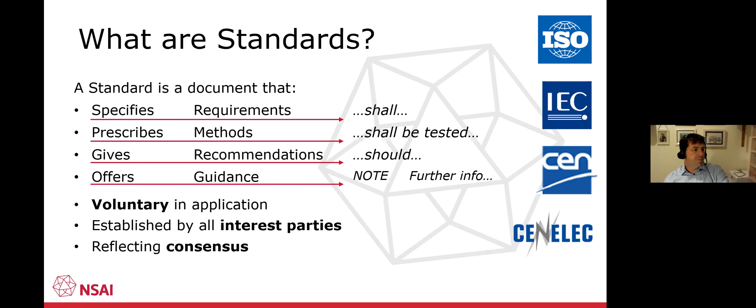Looking briefly at European standards organizations: CENELEC produces all of the European standards for electricity and electrotechnical. CEN produces all of the services and product standards for everything else. And we also have ETSI, who provide the standards for electronic communication.

So if we were to look at a mobile phone, the CENELEC guys would do all of the circuitry standards. The CEN guys would do all of the material standards for the structure of the phone. And the ETSI guys would do all of the standards that make my phone talk to your phone, okay?

That's then based on what we have internationally, where we have the IEC doing the electrical and electrotechnical standards, the ITU providing the communication standards, and then ISO providing all of the other services, management standards, and product standards globally.

We also then have industry standards. An industry standard is a standard that's produced by industry for industry. A few examples: the API standards written by the American Petroleum Institute, used in major parts of the world. However, the API standards have now started to be adopted as ISO standards, and those ISO standards are being used globally. The ASTM standards - as engineers, you'll most likely come across these. They have standards for absolutely everything, especially for materials, and they're quite a fantastic standards organization.

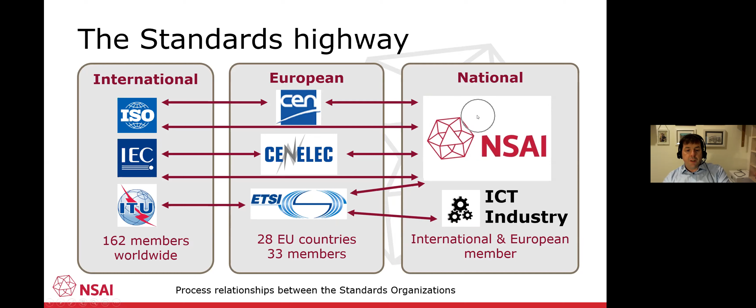So the process for writing a standard is about 3 years, give or take. It starts out with a demand, and a decision is made as to whether or not that work should go ahead. Once the work goes ahead, we spend about 2 years drafting the standard with a group of experts made up of industry, academia, consumers, and regulators. This gives us multi-stakeholder input and ensures that the standard is as balanced and as fair as possible.

When that standard is written, it goes through a consultation process. In ISO, everyone in the world gets a chance to comment on the standard. In Ireland, we publish our standards on a platform called Your Standards, Your Say, so everybody has the opportunity to comment on any draft standards. After the consultation process and the document has been ratified, we publish that document and it is put out there for utilization. And 5 years later, we do a systematic review on it.

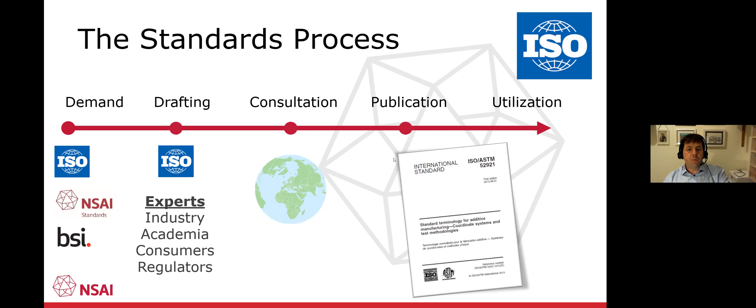Now, looking at the additive manufacturing standards - pretty much for the first time ever, when this new emerging technology came about, and the standards organizations looked at how they were going to standardize it, they decided that they would do one set of additive manufacturing standards. One world, one standard is their motto.

And we have established a partnership. ISO and ASTM have a partnership together whereby they together produce the ISO ASTM standards for additive manufacturing. The Europeans have agreed to adopt all of those standards as they are published.

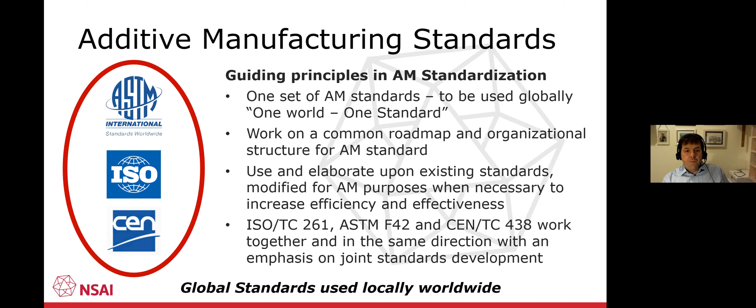These standards are developed in the ISO Technical Committee 261, Additive Manufacturing, with the Secretariat held by Germany. There are 25 participating countries, meaning experts writing these standards come from those countries. There's also a number of observing countries that don't participate.

To date, they have published 19 standards and have approximately 37 standards under development. They're split into working groups: one in terminology, two in methods, process and materials, three in test methods, four in data and design. Those were the four originals. In the last few years they've set up new working groups looking at environmental, health and safety aspects.

They also have a joint working group on aerospace, where the Technical Committee on Aerospace and the Technical Committee on Additive Manufacturing work together to produce additive manufacturing specific standards for aerospace. Similarly, the Plastics Technical Committee and the Additive Manufacturing Committee have joined to produce those standards.

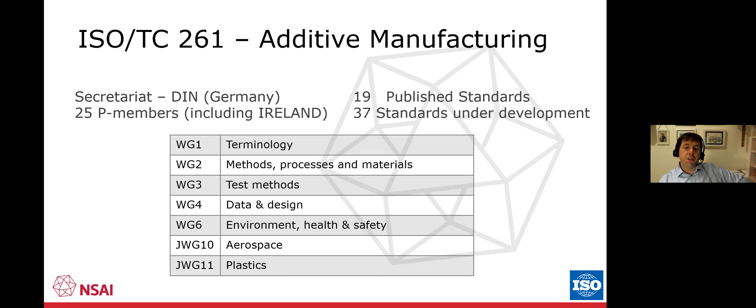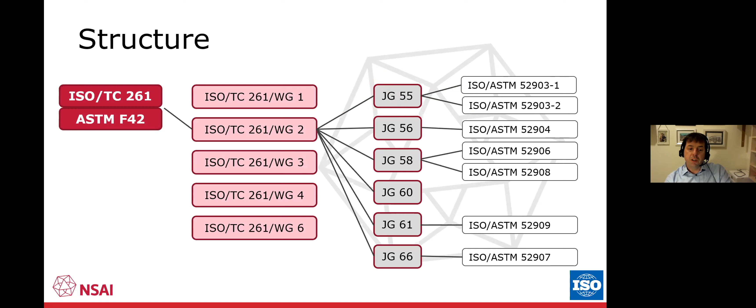Just a quick rundown of the structure: at the very top level our technical committee is represented by the member states. We hand down the work to any one of the working groups. Within those working groups there are a number of joint groups, made up of ASTM and ISO members. These small groups tend to be made up of about 8 to 10 experts, and they will be producing one or two standards each at any one time. So it's quite controlled, but somewhat chaotic at times, with a lot of work going through.

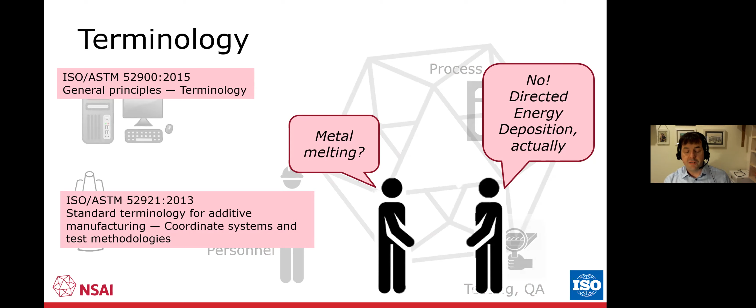Just a quick look at the process for standards in additive manufacturing. We started off with terminology. It seems to be one of the most important standards we write now when it comes to new and emerging technologies. In quantum computing, we've agreed that the first standard we'll write is going to be terminology, because at the minute everybody's calling things different names, and it's getting somewhat confusing. The terminology standard allows us to have defined terms and definitions for the different aspects of that process.

Looking at the data and design, we have requirements and guidelines: functionally graded additive manufacturing design, laser-based powder bed fusion of metals, laser-based powder bed fusion of polymers, and a number of standards dealing with data. There are still a number of works in process dealing with just the data aspects of additive manufacturing.

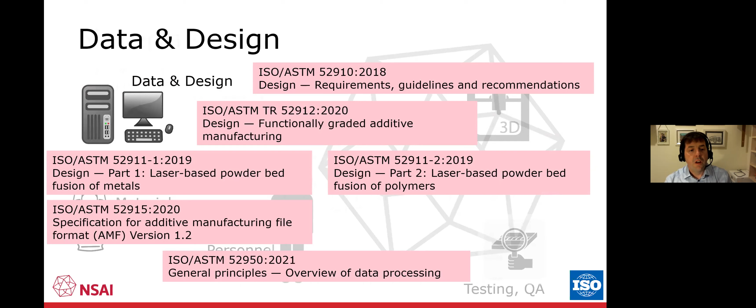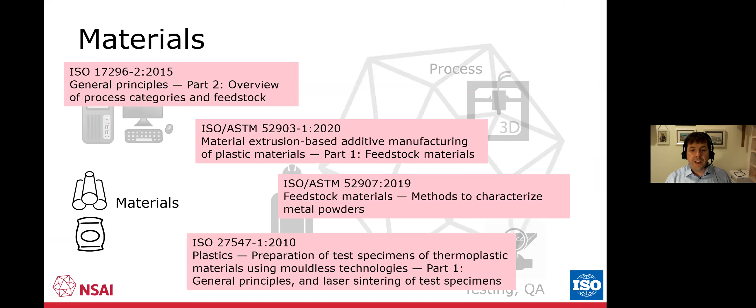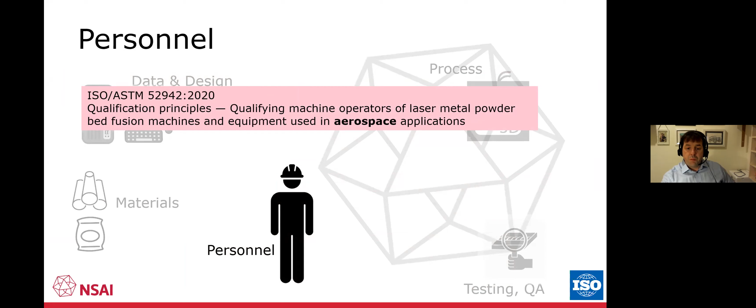On the materials side, quite a lot of work has been done on both polymers and metals and the feedstocks for that — I'm only listing the ones published to date. On the personnel side, the aerospace group was rather quick to get up and do some qualification standards for operators, and there's still a number of other standards in development, all centered around the qualification principles of the personnel involved.

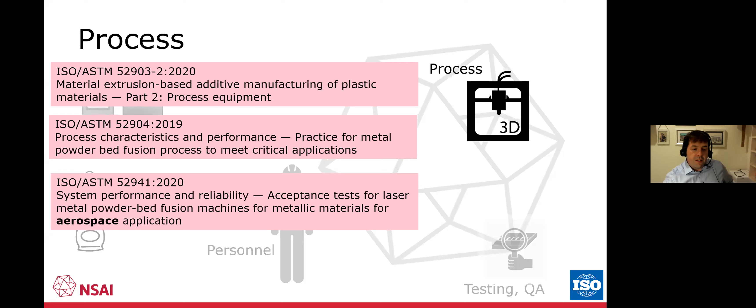In the process category, there's a number of standards already published and many more in development, including one particular standard on acceptance testing for aerospace applications. On testing and inspection, a number of standards now cover the whole QA, QC, non-destructive testing, and analysis of 3D printed or additive manufactured parts — this has been quite challenging and brought up a lot of discussion. These have been exciting standards to get over the line in testing and QA, QC for additive manufacturing.

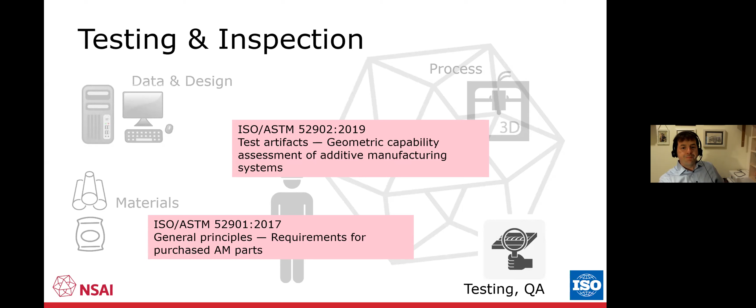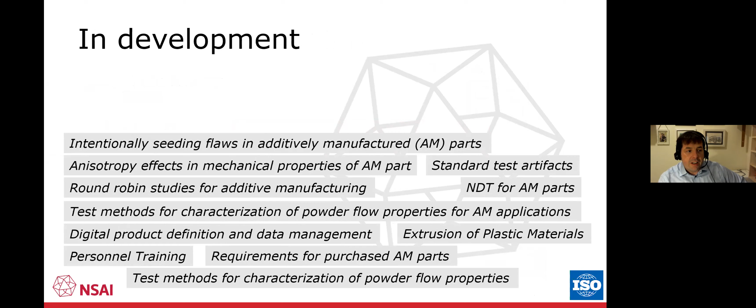Just a very quick glimpse of what's being developed at the moment: intentionally seeded flaws, again for testing, round robin studies in additive manufacturing, NDT of manufacturing, personnel training, and requirements for purchase parts. So pretty much they are looking at every aspect of additive manufacturing, start to finish.

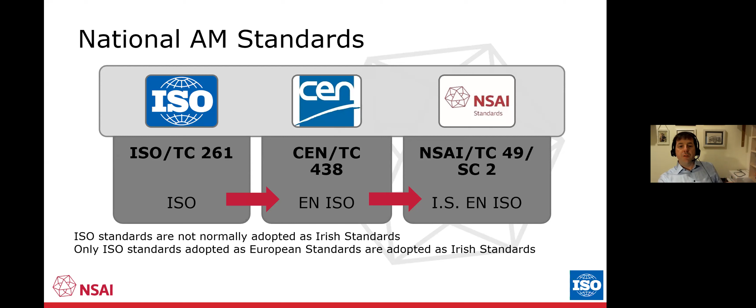The ISO standards are being adopted as European standards, and those European standards are being adopted as Irish standards. So what happens is our ISO ASTM standard is published, it's adopted as a European standard, and then adopted as an Irish standard. What's the difference between a British standard and an Irish standard?

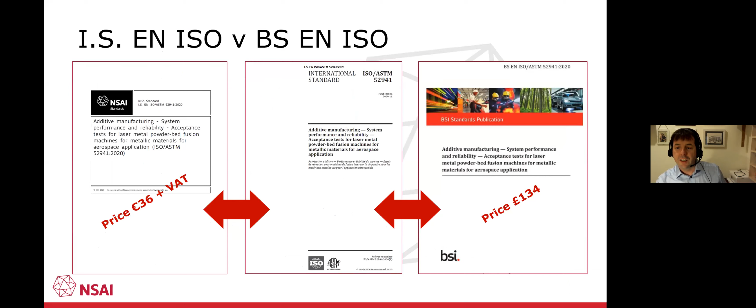Nothing really, only the price and the cover sheet. The British standards have a picture of a fireman on the front of theirs, quite nice. Ours is black and white. On our National Mirror Committee, we have a lot of members representing quite a number of organizations across industry and academia.

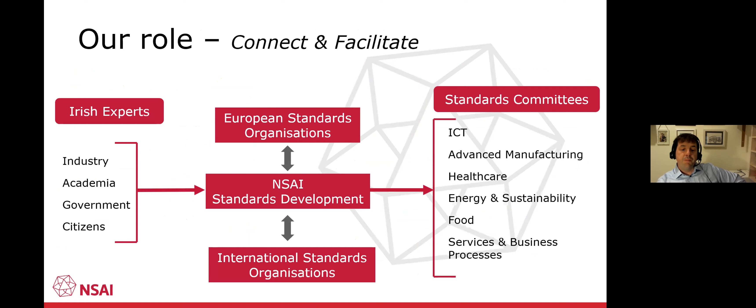They're helping us to monitor the development of the standards. What we do is we bring these people to the table, give them access to the standards writing process, and give them access as well to the international standards organizations where they can get involved in the standards development. If anybody wants to get involved in the writing of a standard, it is quite exciting. We have the link on our website to register your interest, and you can ask us then if you'd like to get involved in the additive manufacturing committee.

So just to wrap it up, standards are all a part of our manufacturing industry. You can see the standards as they develop in additive manufacturing, and you can be part of the standard as it develops. NSAI is here to help you. Just call Fergal. Okay, thank you everyone, I'll pass it over now, John.

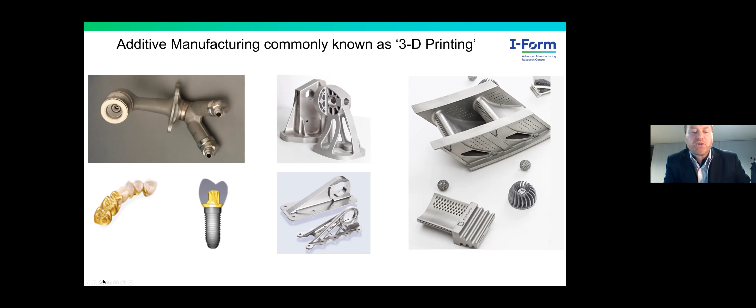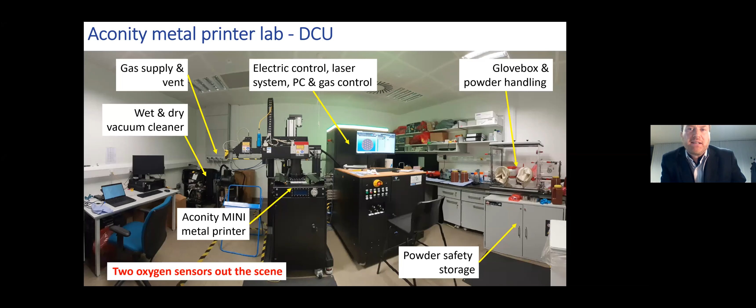The process parameters on the machine, the metal additive manufacturing machine we see in the middle, can also be altered, like power, spot size, and setup. We see an Aconity printer and some pyrometry measurements in line with the laser as it comes down and solidifies the metal in the system, and then some other powder handling components.

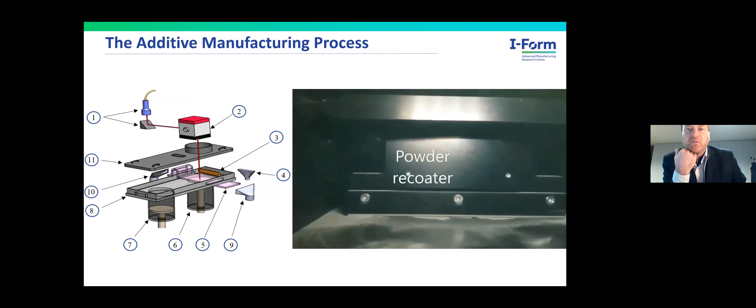The laser traces out the two-dimensional slice of the CAD file, solidifying that powder into that geometry. It's bonded onto the previous layer, and now the powder recoater pulls powder across, recoating a fresh layer set to a specific thickness—it could be 20, 30, or 40 microns—on top of the previously solidified layer. The next layer is then melted and bonded, micro-welded into the previous layer, and that process repeats until the final component is produced, all in an inert atmosphere.

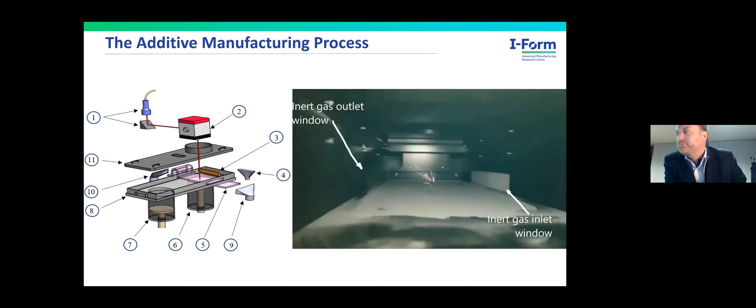The process parameter inputs here include laser power, scan speed, scan strategy, layer thickness, and laser beam spot size. Taking the power and spot size gives the overall energy density, and the energy density per time relates to the scan speed and pulse repetition frequency if the laser is pulsed, along with the powder properties.

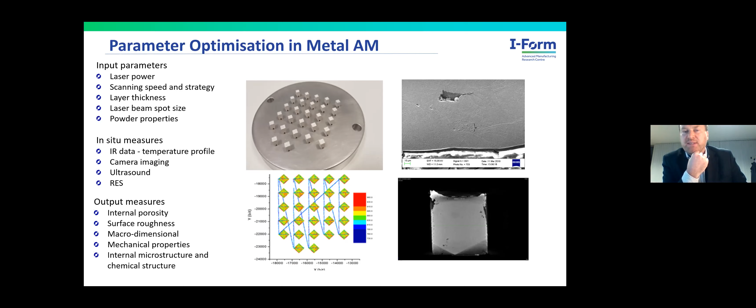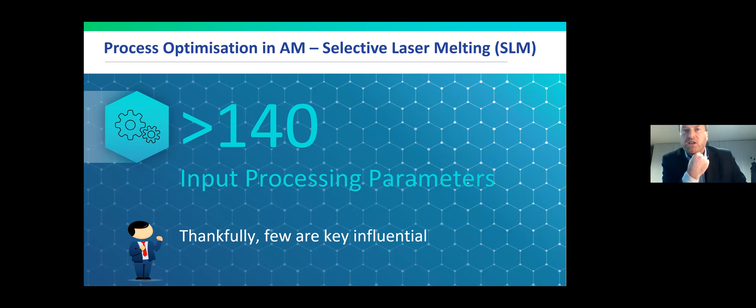It's a very complicated process with many process parameters, but only a few main ones we know are most important, and we can concentrate on those for process optimization. We take the CAD file, the powder properties, process it through the machine, take the in situ monitoring data and the ex situ diagnostic data, and feed all that back to give a better set of processing parameters in an iterative manner, arriving at optimized parameters.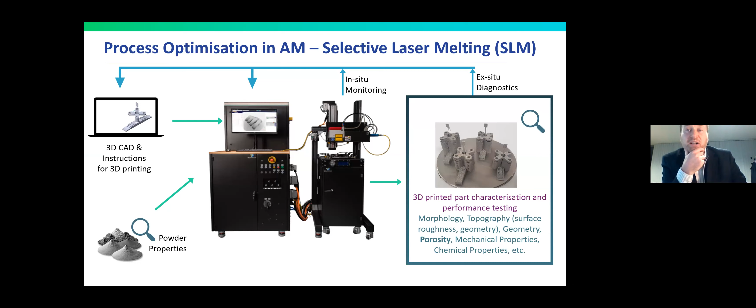There's an example here showing a rocket fuel valve, testing different topology optimizations for that component.

In situ and ex situ diagnostics for process quality control are needed because often we're using different materials, different geometries, or a different machine, and in all cases the process parameters change to give the optimal output with no defects and correct quality. In terms of commercial machines to date, all of these are still open-loop control processes—we can understand from in situ monitoring whether the process is in control or out of control.

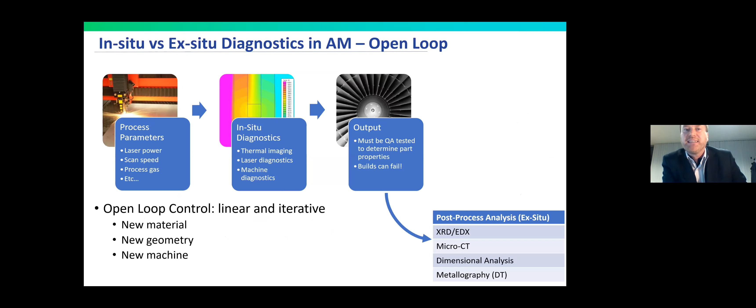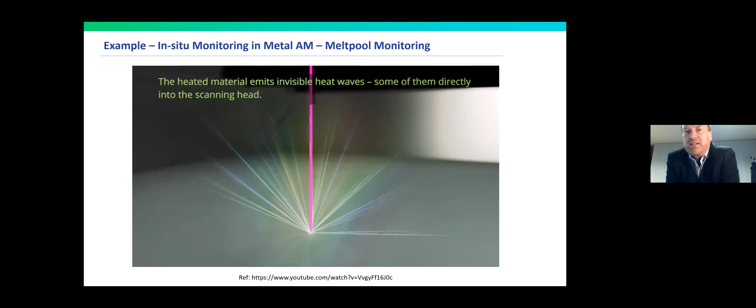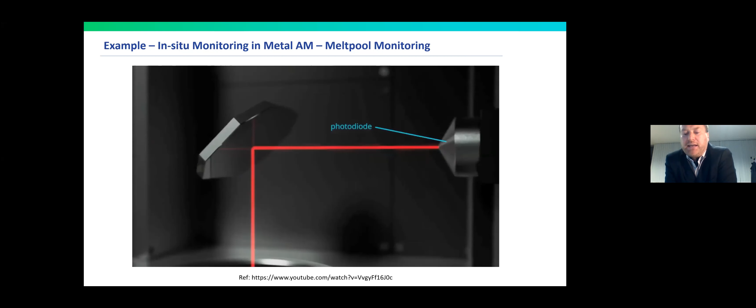One example of implementation: the laser beam goes down to melt the powder, and the light reflected back—in the infrared spectrum or a different wavelength—goes to a photodiode or infrared pyrometer to measure the actual temperature at each location within the build.

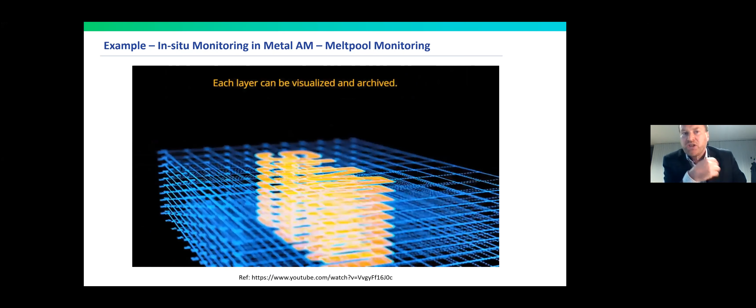We have a vast amount of data, literally terabytes, and handling this data becomes an issue—how can you actually process and handle all of it? The best way is using machine learning techniques rather than looking at the data streams individually. This is an example of 4 layers of data.

On the right-hand side here is an array of 9 by 9 samples, 81 samples total, following a conventional design of experiments with 4 parameters at 3 levels—81 sets of parameters we're trialing. We can see the temperature results on each of 4 layers. Taking these two samples, they're quite hot, more red in the color map, relative to more green or yellowish samples. Looking from the layer at 1 millimeter to 2 millimeters to 3 millimeters, we can see the process parameters having an overriding effect on the overall temperature and temperature gradient, which relates back to the microstructure and porosity that develops during the process.

That allows us to understand, do we need to actually stop the build? We know the part is not going to be correct, so we can stop before we go through hours of printing and end up with a part that can't be used. So we can understand from the in-process monitoring data whether the process is in control or out of control. This helps to reduce overall costs in the process.

It helps to achieve production gains in the process, and ultimately it helps to achieve best product performance as well, knowing it meets the requirements of the end application, and knowing the sensitivity of that to the overall process parameters. If we vary the process parameters slightly, can we be sure that we're still in control from the in-process monitoring data and even from the process parameters that we set?

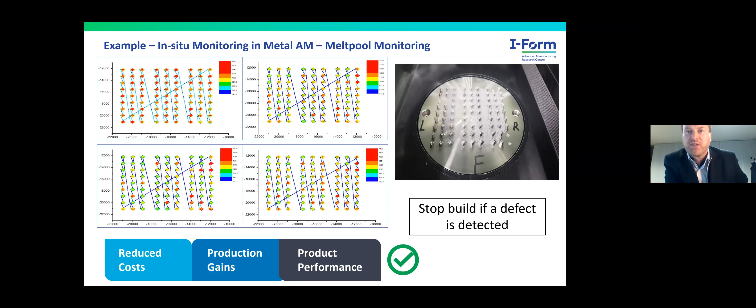As an example of how or why a defect may occur, this shows some of the areas where porosity may occur. It may occur due to lack of fusion, intergranular liquid region being cut off during solidification, gas evolution during solidification, solidified undulations during the vapor phase and the plasma being generated, or it could be due to keyhole formation where there's overheating.

This sample presents lack of fusion. Here we see the pores being trapped by the solidifying liquid, where the melt pool is too large, and this X-ray during the process shows us that pore is then trapped into the part.

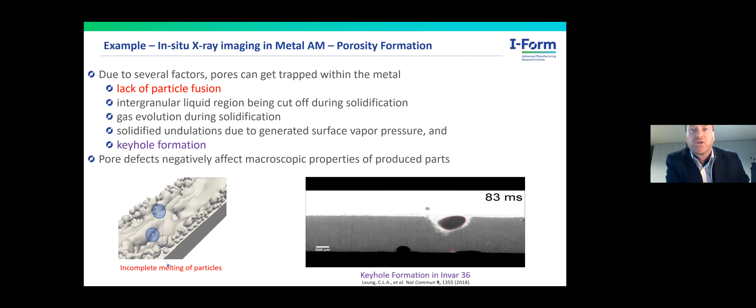Generally, keyhole formation and lack of fusion are designed out very quickly through design of experiments, and then we refine in order to get the overall part to be as we want it to be.

So we do these screening tests, then design of experiments, then sensitivity analysis on the selected parameters, and finally either design of experiments in depth, or more often now design of experiments combined with machine learning, to get to the optimized solution even more quickly as an advanced statistical approach.

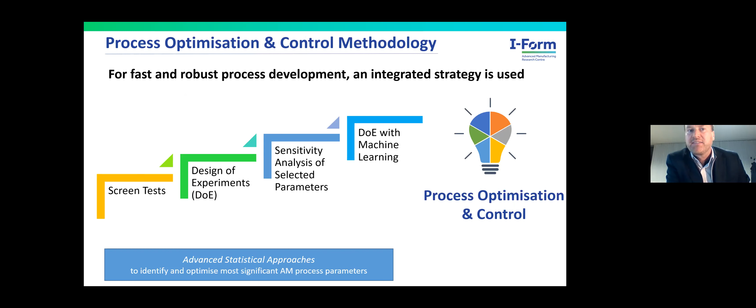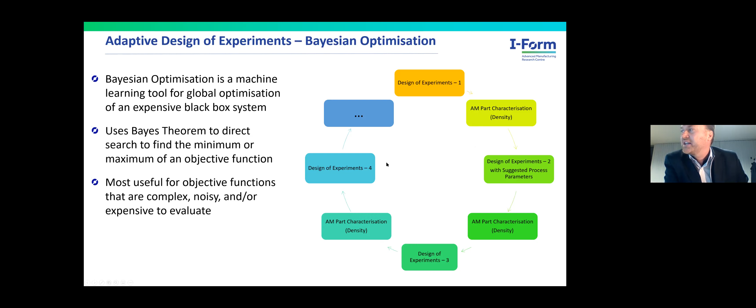One of the machine learning techniques we use is Bayesian optimization. Using Bayes' theorem, we can run a design of experiments, and rather than us deciding the next set of parameters to trial, we run it through Bayesian optimization to understand the most optimal next design of experiments to run in order to get to the correct process parameters more quickly. We can iterate through this using Bayesian optimization to reach the optimized solution faster than in conventional design of experiments.

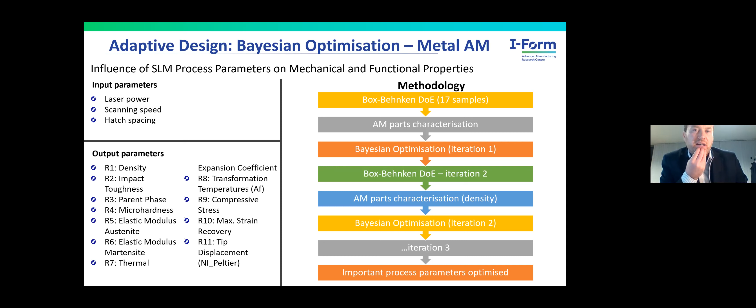As an example of how we might use this machine learning algorithm, we have input parameters that we want to vary and output parameters that we want to measure. We run it, for example, according to a Box-Behnken design, then pass those results through Bayesian optimization, which allows us to select the process parameters for the next Box-Behnken design of experiments, and we iterate through that process to reach the solution more quickly.

As an example of where this is used in industry right now, there's a company called Intellegens working with University of Sheffield and Boeing, using machine learning to optimize metal additive manufacturing. In a recent article from January this year, they suggest they can reduce the number of experimental cycles by around 80%.

Another example: the company Materialise in Belgium have also introduced similar software using advanced statistical approaches, termed Process Tuner. With this software, they achieve similar reductions in the overall number of experiments required to reach the final solution more quickly.

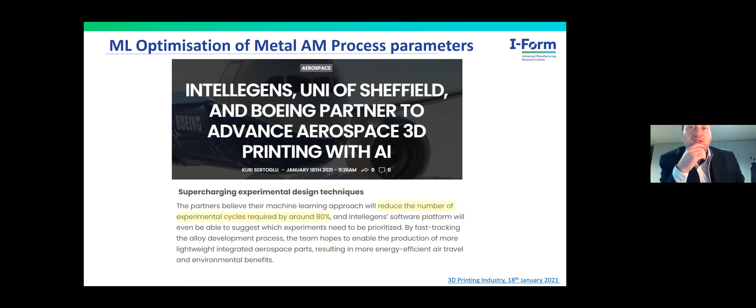I'll give a brief overview of how I-Form is helping to achieve these solutions for advanced manufacturing, including additive manufacturing, by using the digitization of additive manufacturing, fundamental process modeling, and advanced analytical machine learning techniques, combining all three areas to reach solutions more optimally for advanced manufacturing processes.

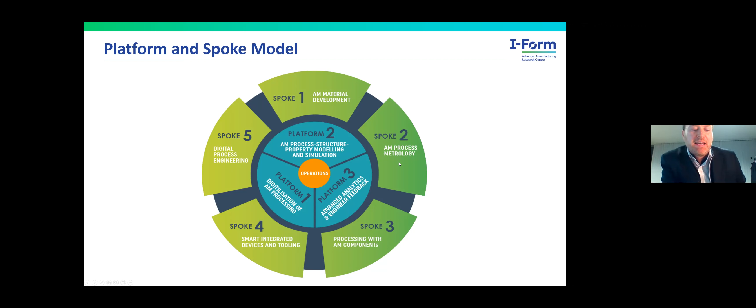Within I-Form, we have a lot of activities working directly on company projects for specific applications and end goals. I briefly mentioned we have an Advanced Metallic Systems Centre for Doctoral Training, where we hire 25 to 30 PhD students, and these projects all have to be linked to company problems to solve company problems.

So it's a strong collaboration.

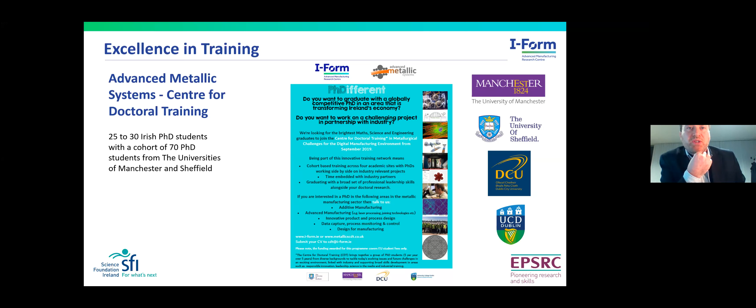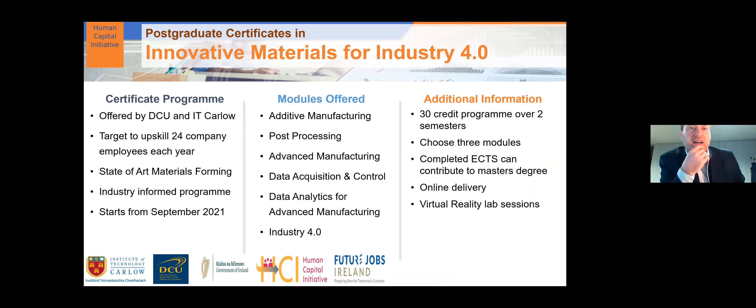Also in terms of training, the students get training from Manchester, Sheffield, UCD and DCU as part of their overall training program, and have to work on a metallic system problem for their PhD related to solving a company problem. We also provide training courses to industry. As an example, we provide Innovative Materials for Industry 4.0 under the Human Capital Initiative. So if there's any industry partner looking for training, we can offer bespoke training initiatives through these types of schemes across I-Form and the institutions. So thank you very much for listening, and looking forward to questions later.

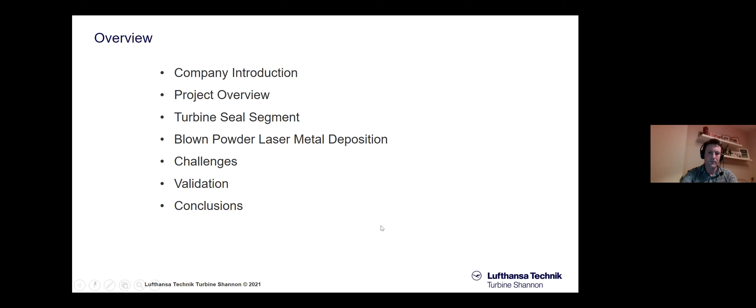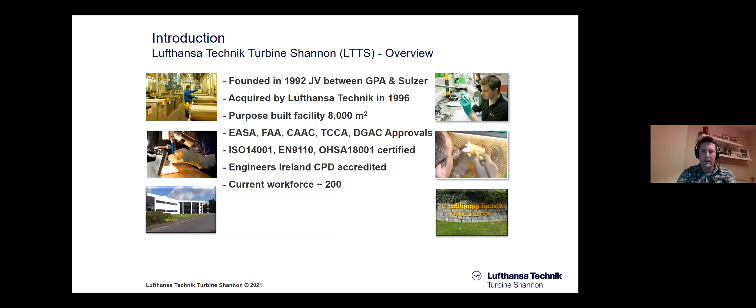So Lufthansa Technik is one of the sectors within the overall Lufthansa airline group, that includes passenger transportation, logistics, catering, and other activities. As mentioned in the video, we were founded in 1992, a joint venture between GPA and Sulzer, acquired by Lufthansa Technik in 1996, purpose-built facility. We have EASA, FAA, CAAC, TCCA, and DGAC approvals. We're also ISO 14001, EN9110, and OHSA 18001 certified. We're Engineers Ireland CPD accredited, and we have a current workforce of approximately 200 people.

So to get into the technical side of the project, we utilize additive manufacturing for the repair of Rolls-Royce turbine seal segments using blown powder metal deposition, which is a specific additive manufacturing technique. The engines we specifically work on are Rolls-Royce turbofan engines. Rolls-Royce are one of the main aerospace engine suppliers globally. Their engines have up to 97,000 pounds of thrust, a bypass ratio as high as 10:1.

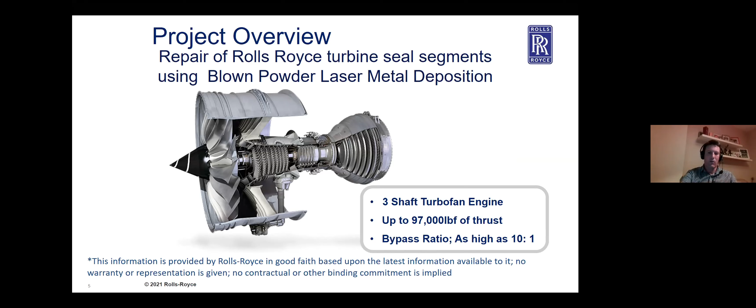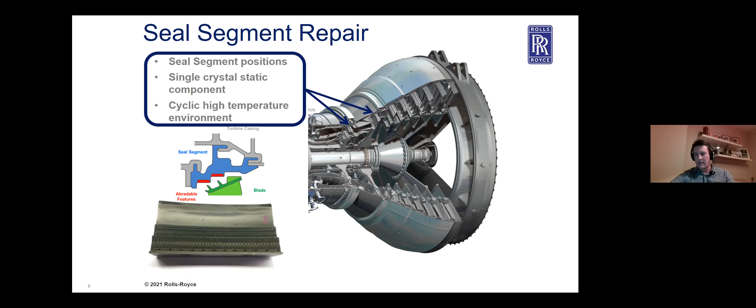So the seal segment, where that fits in the overall engine - as you can see here, this is the hot or high pressure section and intermediate pressure section of the turbine. The seal segment is a static component which sits in the outside area of this ring. The turbine blades, while they rotate, abrade into the seal segment. That seal initially creates a barrier against gas flow leakage, thereby increasing the efficiency of the engine. So over time, that red surface you can see will wear away, increasing gas flow leakage and hence reducing engine efficiency.

So how we repair this component - laser metal deposition is used to generate the abradable support structure that has been worn away. The repaired seal segment is required to perform equivalent to the OEM design. By doing this repair capability, it allows the maximization of life cycle cost and enables economic viability. Currently, a seal segment would be replaced with a new one during any overhaul visit. So this allows the opportunity to replace with a repaired segment at a fraction of the cost.

So just to explain some of the images here - on the left, we have a seal segment which would be after undergoing a number of thousands of engine life cycles. This is how we would receive it in LTTS. We would pre-machine the worn surfaces. Then, in the top image in the center, we would use laser metal deposition to rebuild that structure, which you can see a final version of below that. Then we would fill this support structure with a sinter material and heat treat or cure this, so it would now form a new abradable structure similar to OEM.

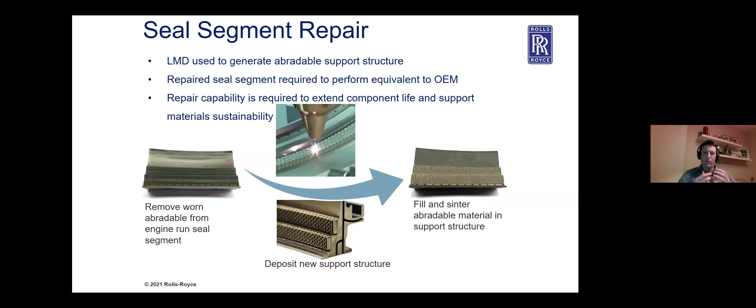So why did we use additive manufacturing for this specific repair? Additive manufacturing and laser blown powder specifically enables repair of components exposed to harsh high temperature environments, which are not suitable for conventional repair techniques, like braze or honeycomb repairs.

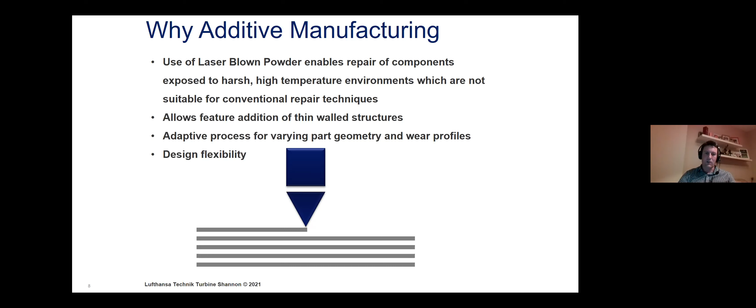It also allows feature addition of thin wall structures, giving a great degree of design flexibility and access by allowing very accurate geometry to be deposited. It's also an adaptive process, which is important because we have varying part geometry and wear profiles. Every part that comes into a shop is typically unique in its wear profile.

To explain the blown powder laser metal deposition process in more detail, we have an additive layer methodology, similar to what Dermot mentioned earlier, where we deposit a layer. Initially this layer will be embedded in the base material, forming a strong bond. We then build layer on top of that. Each layer has the ability to be a slightly different geometry, layer thickness, and layer height, by varying our inputs.

This feature addition also allows us to access restricted areas, as you can see there with some high wall structures and extended nozzles to get in and access these areas.

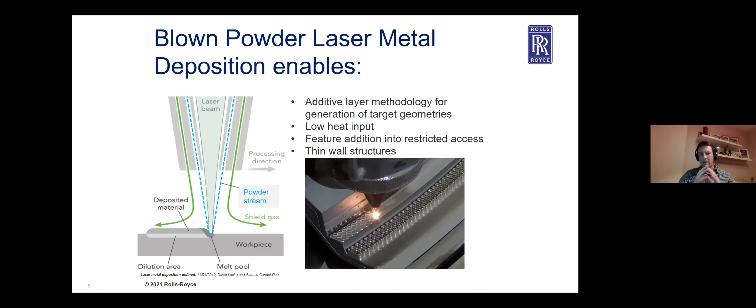Some of the material challenges we encountered - typically in aerospace, the materials we use to suit engine environments are difficult to weld. This specific base material is a single crystal superalloy, designed to maintain its strength and oxidation resistance in harsh operating environments. There's also a requirement for low dilution rates so that the base material can retain its mechanical and thermophysical properties.

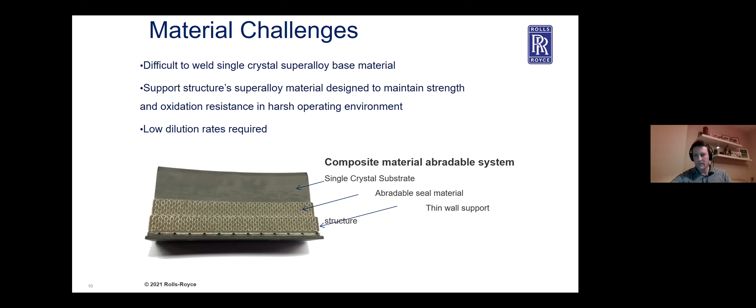Some of the process challenges we encountered are mainly around component wear. Each segment comes from a different engine with unique life cycles, and each individual segment has unique wear profiles that need to be accounted for. No two parts will ever be identical, which makes standardization of the process more difficult. So we had to come up with a flexible repair process adaptive to each unique part, and our deposition process, program, and parameters revolve around this adaptation.

In relation to the challenges on the deposition process itself, our requirement is for very thin wall support structure with very tight geometric tolerances. We have a very small laser and powder spot size, which would be at the lower end of the LMD process typically.

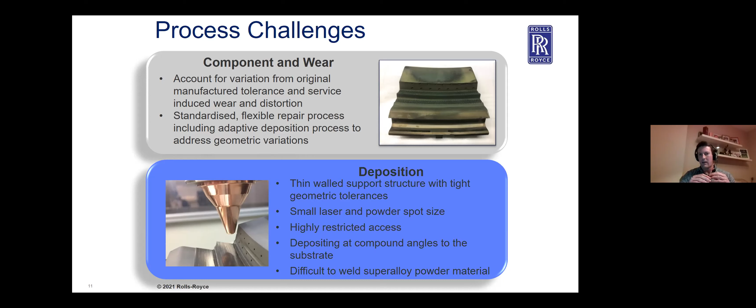We also deposit at compound angles to the substrate, which allows us even greater access, as you can see in the image. But by doing that, it also provides some challenges in having melt pools at various radiuses and slopes. So we've done extensive DOEs, as Dermot mapped out earlier, with a very similar process where we've identified our key inputs, and also the effect of various slopes and radiuses on these inputs, and identified a key process window from that.

Some of the other process challenges are around control, monitoring, and stability. We have over 60 controlled input variables associated with laser - laser power, laser spot size, laser quality, powder feed rate, powder stability, and nozzle wear, which is a very big key parameter for us. So our process is never at a fixed point.

Our nozzles wear from the inside out due to the abrasion of the nickel superalloy powder. In doing that, we have to adapt our inputs with powder feed to meet a fixed output. So we have to constantly monitor and input control plans that closely control this.

I have an embedded video here of the deposition process, which you can see in more detail than earlier. This is a close-up view. It will run initially at normal speed, then jump ahead to show you an actual additive build structure, running layer by layer. Initially the first layer is currently embedding in the existing surface of the base material.

As the tool path comes back over, it will deposit another layer on top of that, and so on and so forth. Each layer has a unique geometry, unique thickness, a unique set of parameters, so that you can come up with an overall structure. There's also design flexibility, depending on the base material geometry and access requirements, which you can adjust to suit.

As you can see, we've jumped ahead - we've seen probably half of the additive structure built here. We build a different number of structures in different parts. As you can see here, this is the first structure, and there's also a similar structure above that will be deposited next. But some components in the family that we repair have one, two, or three different structures all in one part.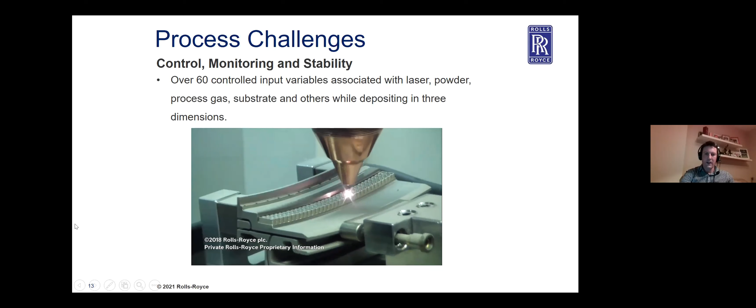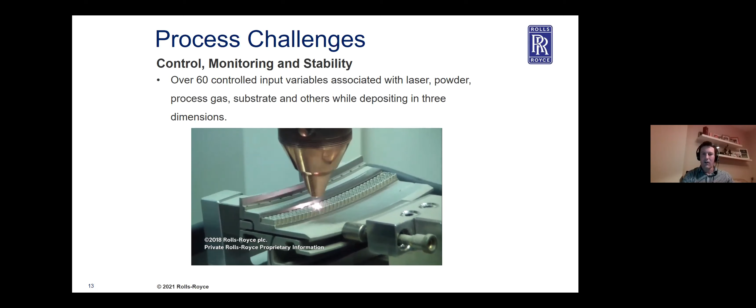Hopefully I won't go to the end of this video because it's quite long, but it might give you a good insight into the start, middle, and end of that process and how those final structures actually look.

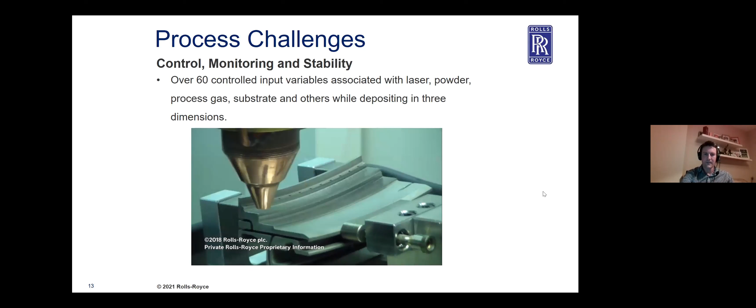We also then, for each product family, will provide a set or a half set of engine test parts that will be engine tested in a test cell. They'll undergo representative cycles that they would see in service.

You can see an image here of that deposition structure you would have seen in the previous video. This is after approximately 2,000 cycles of a typical 3,000 cycle test, which would represent a life cycle of an engine before it has to come in for maintenance, repair, or overhaul. As you can see from this image, you can still make out individual layers in that structure. The vast majority of it is still intact, even after the harsh environment of mechanical stresses, oxidation, and corrosion.

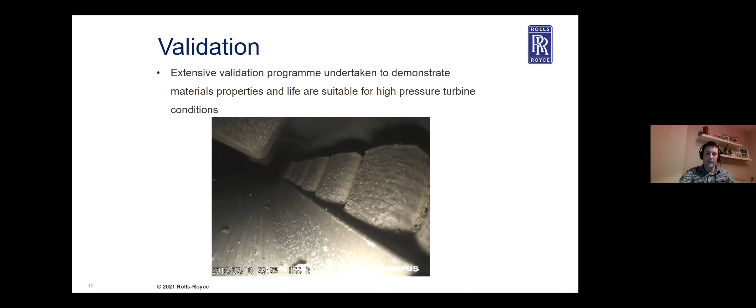We've seen equivalency to OEM parts in our engine testing to date on different products, which is very important in our sector.

Just to conclude, the increased utilization of laser blown powder technology has provided us with opportunities for extended component life, and it also supports material sustainability. Adaptively repaired turbine components have demonstrated excellent performance during Rolls-Royce Trent engine tests and supported entry into service. Manufacturing capability was now entering the pre-production phase, and since this pack was developed, we've entered into early production phase, and we have plans for multiple different product families of seal segments to be validated and put into industrialization in the coming years.

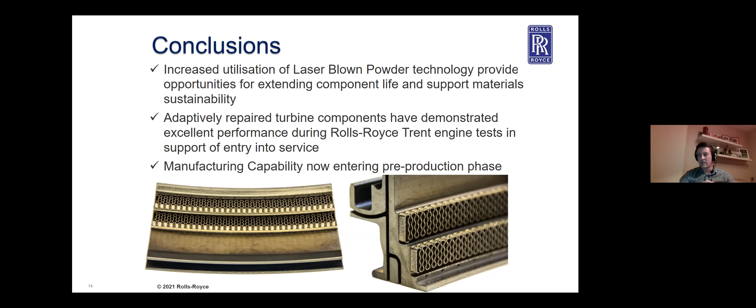So that's my presentation. Hopefully that gave you an insight into our journey with additive manufacturing and the use case LTTS have. Thank you very much.